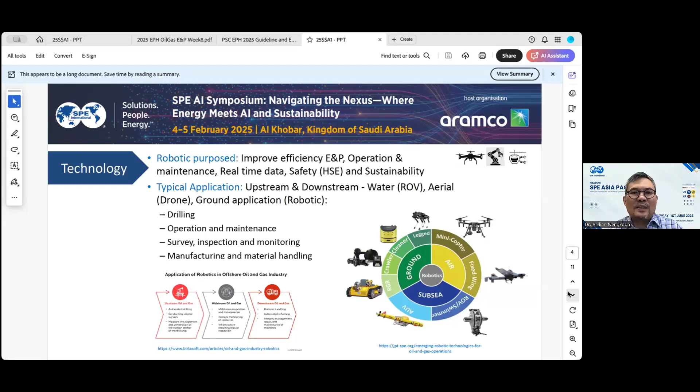So this technology itself is currently ongoing, and we use it in many cases. And of course, as petroleum engineers, we ask ourselves, what is the robotic inside? What kind of hardware or software content is inside these tools?

Let me explain a little bit the components inside every robot - either drone or ROV in the subsea, and also leg type ground robotic. Every robot should have at least 4 or 5 components. The key component, of course, is the controller, and inside the controller there is a power system.

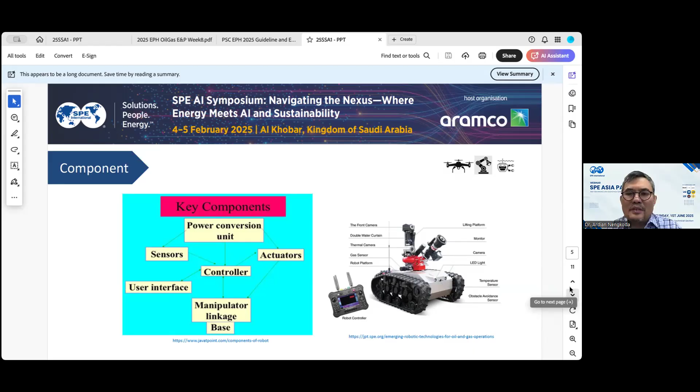Because every robot needs a power system, they also need to have an actuator, sensors, and also a manipulator. All of these are also provided with human interface tools such as a UI. On your right side, there was an example where kids or ourselves use a robot as a game in everyday basis - this is one example of the tractor type robotic currently used in our industry. So that's the components of every robot.

Let me also share with you pictures of an example of the robots currently used across our oil and gas industry and also energy. On your left side at the top, there was a 4-legged robotic from Boston Dynamics.

In the middle, there's a robot inside of the pipeline doing painting. There is an internal special painting used in our oil and gas pipeline to serve sour gas or sour oil, something like that.

On your right side, there is a drone - drones are flying around within the offshore platform facility. This is an example from Abu Dhabi and also from Saudi Arabia. At the bottom left, there was a tractor type robot being used currently in offshore - that's an example from PTTEP in Thailand offshore. And of course, another very popular one is the ROV inspecting subsea pipeline applications.

So how is this latest technology applied, for example, at the upstream wellhead or Christmas tree inspection? Basically, they can help with wellhead maintenance, such as greasing, painting, plugging, and some drones can help doing real-time surveillance to check if there is leaking or growth of the well, and also taking data both aerial or at the platform itself, and also at the subsea.

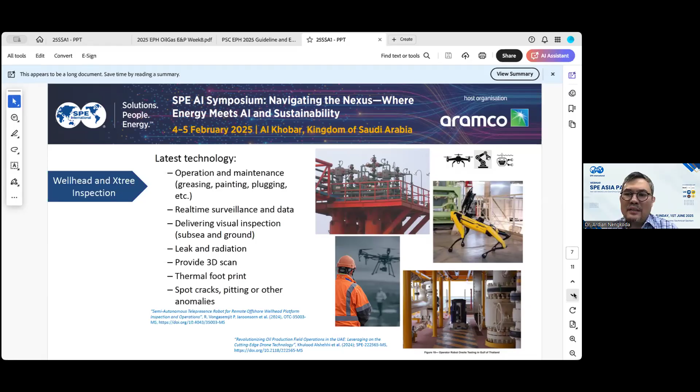The next topic that's very interesting for all of us is the challenges. We observe the challenges happening so far are in terms of cost. Most of these robotics are expensive, so we need to be careful hiring them and reducing operating costs directly. Before we hire any robotic services, as an operating company we derive the pros and cons, what's the economic benefit and so on.

We also observe skill gaps. Pak Rian and Pak Dr. Agus will highlight this later - what kind of skill, training, and certification we need, because not every drone or every robotic can be applied easily. There is some expectation from the government and local authority on how to operate any drone, for example.

And then what is the automation impact? As a student, for example, we are afraid that the robot will replace our skill, our work. Is there a true story that the robot will replace humans? I think that needs to be carefully observed and analyzed.

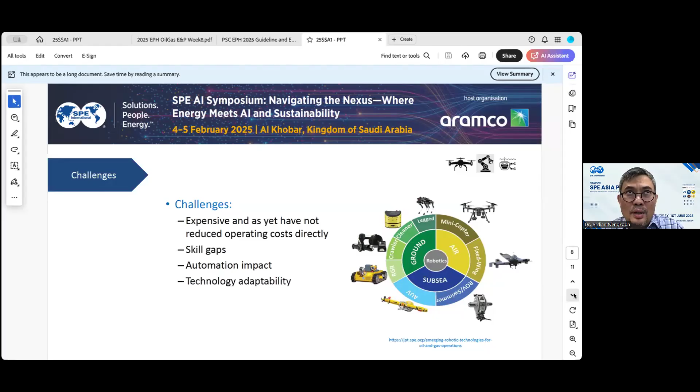the robotic as a tool is born from the military industry. Then it grew to medical - if you've heard about medical robot applications - then grew everywhere across manufacturing and industry. So we should not be afraid of the presence of the robot. We should capitalize on the opportunity. That's the main message.

Currently, what does the future look like for a drone, for an ROV, for land and ground robotic applications? As you can see on your right side, the trend and demand for drones especially are increasing very massively. It can be used everywhere, benefiting our day-to-day operation or activity. The way Mbak Yuni and I see it, the future of robotics within oil and gas, energy, is not far away from what's currently happening.

We expect more and more integration of AI and machine learning into the robot. We believe the cost to develop and hire this robotic technology will reduce over time. And we believe the robot will become smaller, more intelligent, more reliable, and capable of carrying out more tasks.

Like Bapak Dr. Agus and Pak Dr. Oki Muraza, we hope that with the spirit of today, Hari Pancasila, there will be more made-in-Indonesia robotic hardware or robotic tools. We also observe that the robot will hopefully produce a lot of data, so there will be a trend of cloud computing, software as a service, and robotics as a service, something like that.

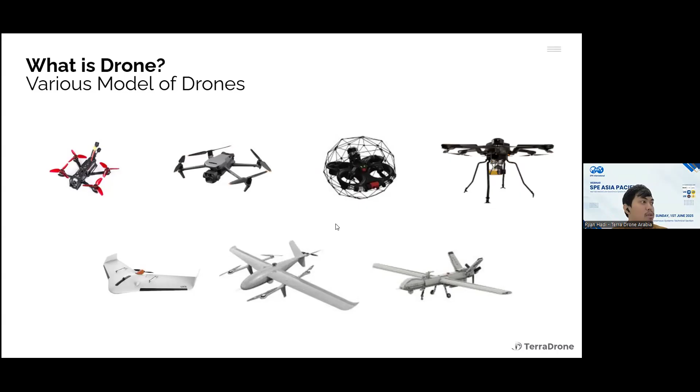Right now, all of these drones are available in the market, and they're being used for particular cases, really helpful especially for each domain. As I mentioned, there are some correct terms, but it's really technical, so I don't really encourage you to read into this. I just want to mention that drones are already being used a lot in many industries, not only oil and gas, but also construction, infrastructure, power and utilities, mining, agriculture, and others.

And the trend is still there. Even though we've been seeing drones for quite some time, used in many use cases, the use case is still growing, and the technology is also growing very fast. So it's really the right time, if you're interested in drones, to try to include it as part of your skill set.

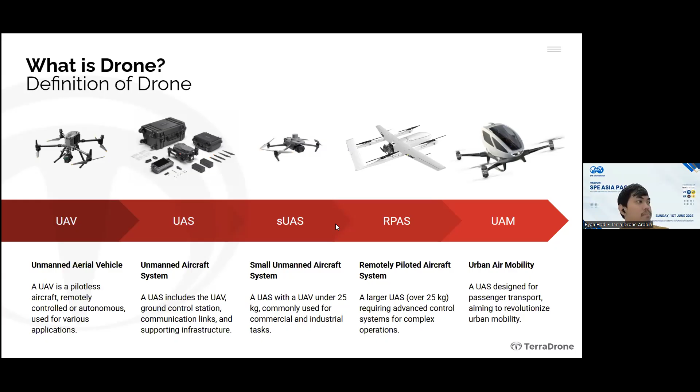And when you talk about drones, there's already a clear categorization based on weight. We have drones that are very small, less than 250 grams, useful for specific use cases. Then we have drones larger than 150 kgs, mainly used for delivery and logistics purposes, but also for surveillance. But most of the drones used in industries are actually these two: micro and small drones.

Usually the drone weighs between 250 grams to 25 kg, considered formally as a small unmanned aircraft system, or SUAS. Most countries already have specific regulations on that. It has been used because it's really versatile, you can play around with the payload, you can play around with the model, so that it can serve you for a specific purpose.

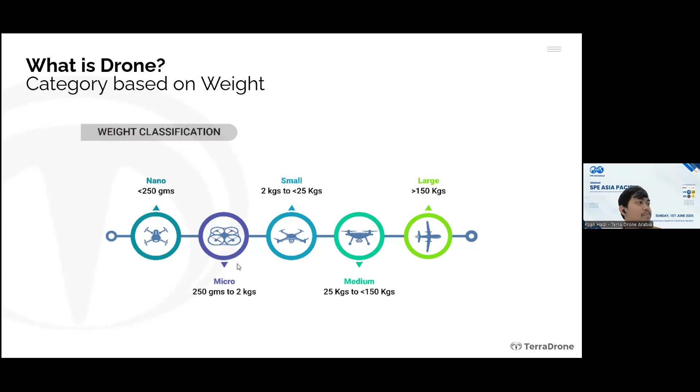In terms of the model and characteristics, there are also some categories, but I think that's a bit too technical, so I won't touch on that.

What I would like to share more here is about applications, as the title of my presentation suggests. I'd like to focus more on practical use cases, but before that, let me explain.

When we talk about applications of using drones, we can split into three main categories. The first is sensing, where the drone's main role is to collect data, which can be used for inspections, surveillance, or survey and mapping.

We can use any kind of payloads for this. For example, for inspections, as simple as taking pictures of oil and gas equipment, and based on these pictures we can identify if there's any damage, cracks, or corrosion. Right now, inspections can even include NDT inspection using drones.

We can easily do thickness measurement using UT or EMAT, or even measure coating thickness using drones. When it comes to inspections on oil and gas equipment during shutdowns, this practice eliminates the requirement to erect scaffolding, saving a lot of time and cost, and shortening the shutdown period, especially for inspection scope.

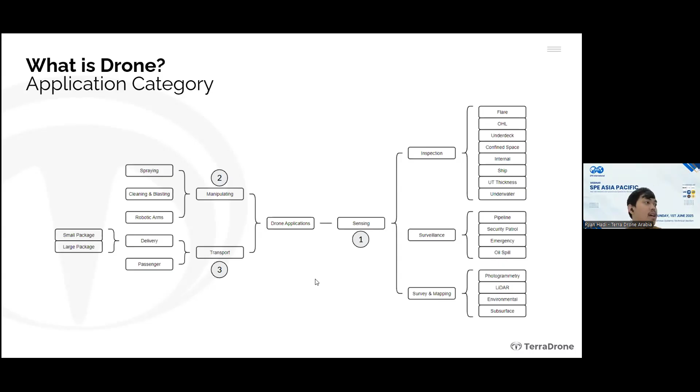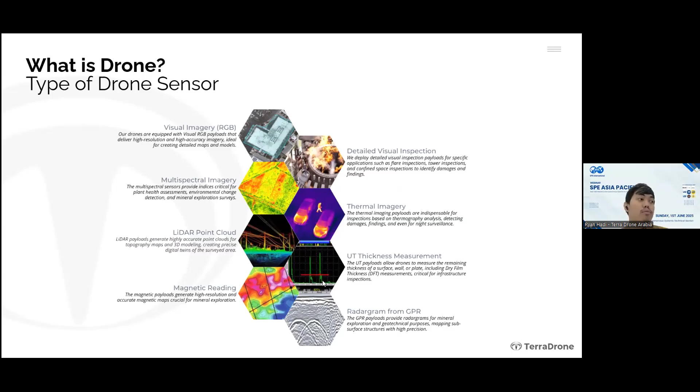In terms of data, as I mentioned earlier, we have many options—not only visual pictures but also multispectral imagery, thermal imagery, UT inspections, and even geophysical sensors that can be equipped on drones, giving us magnetic readings or radargrams from georadar, among other things.

In terms of application, I want to share the latest survey conducted by a market intelligence company in Europe. Right now, most drone applications are mainly related to mapping and surveying, especially in construction and infrastructure, since that's where the main benefit is obtained. But inspection is also significant, mostly happening in oil and gas.

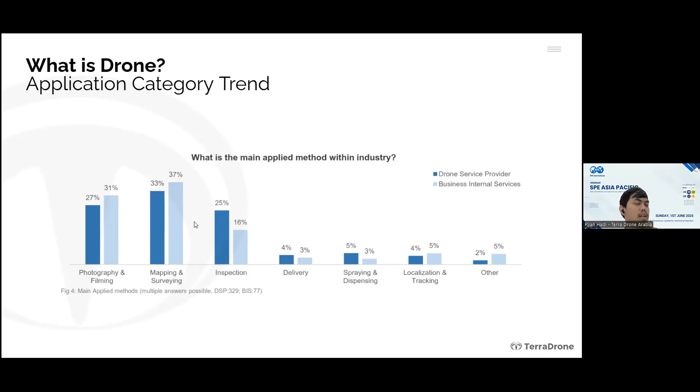Why is China so big? Because in China, drones are used everywhere. You can order KFC and it will be delivered by drone, and this has been happening for years, not just last year but already 5 years ago. That's why we see a lot of drones flying in China, even in entertainment, like drone shows where drones fly together to form shapes like dragons. That's why China is there, and flying in China is pretty easy.

The number of flight hours in China is huge. Second is USA because of the size of the business and economy, and third is Europe. Most countries with a lot of flight hours are mainly driven by ease of regulations. In US, China, and Europe it's pretty easy to fly, but in other countries it's still difficult. However, we see this expanding, with other regions trying to catch up in terms of flight hours.

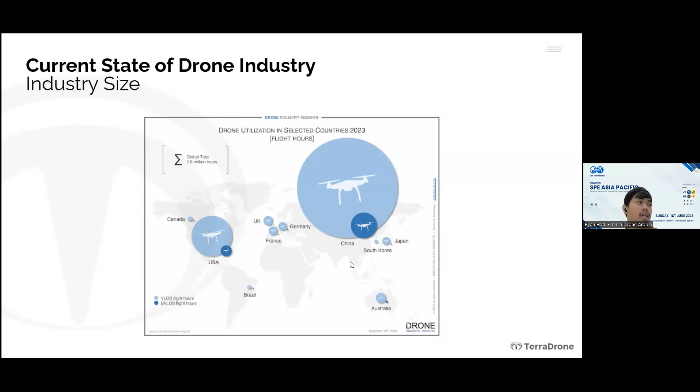So it's really interesting right now to see how drones will be helpful in most industries. When we talk about drone companies, maybe 10 years ago we only had around 100 to 150 in total, but right now there are more than 2,000 drone companies in the world. In Indonesia alone, we have more than a hundred, whether focused on developing hardware or providing services.

I just wanted to show you again the growth of the industry, and definitely it's there because it's driven by market demand.

When we talk about applications in oil and gas, I'll be very specific. We can split it mainly into 4 categories: the first is activities related to inspections, the second is survey and mapping, the third is environmental monitoring, and the last is surveillance.

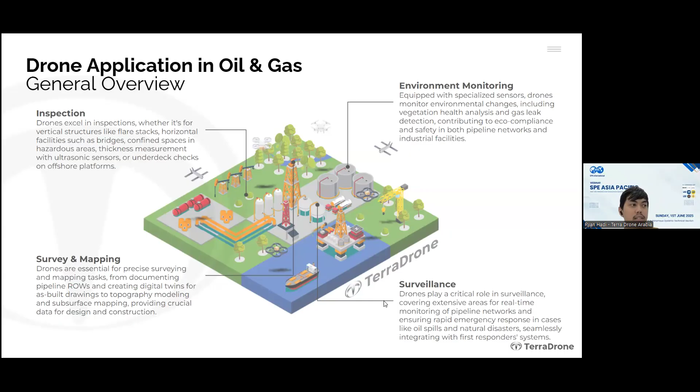For inspection, as I shared earlier, drones can easily take pictures, whether visual or thermal, and can also do NDT inspection. Applications include flare, OHL inspection and any vertical structures. We also have applications for confined spaces, sending drones inside a storage tank or boiler or any other confined space so it can tackle work safety issues easily.

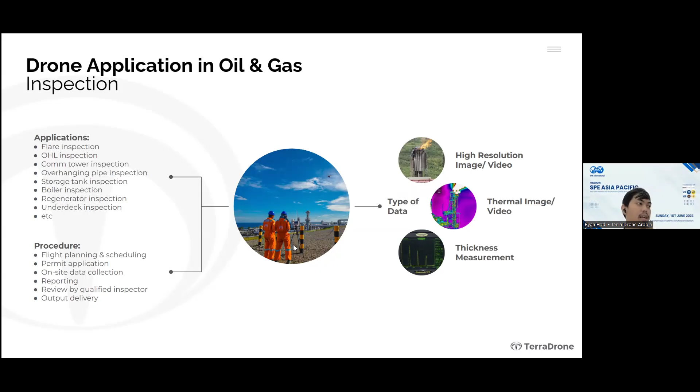One example of using drones in inspection is visual inspection on a flare. As you can see, the drone can easily get details because most drones used for inspection are equipped with an ultra zoom camera, which can zoom up to 200 times so you can get all the details required.

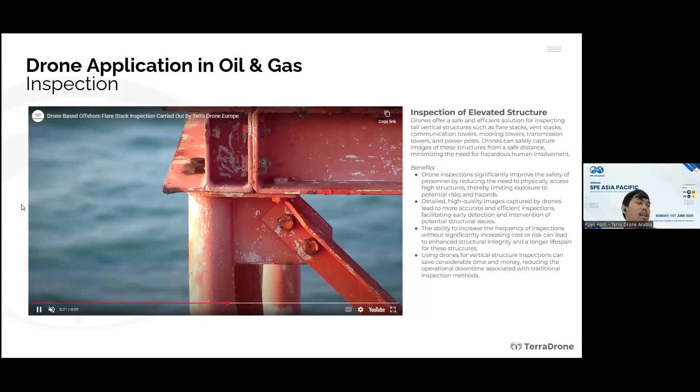Another example is using drones for UT inspection like this. The drone needs to be in contact, but it can measure all the points easily so we can eliminate the requirement of scaffolding.

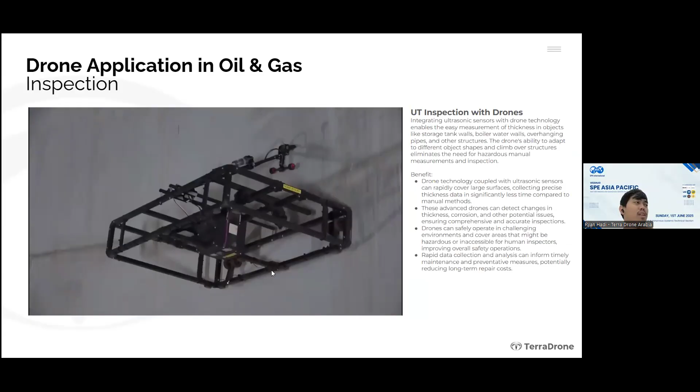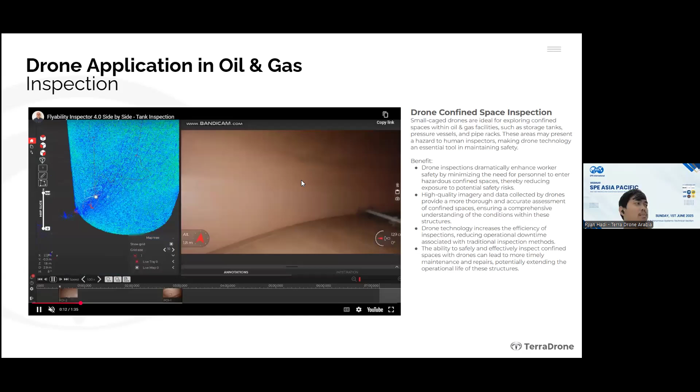The third example is confined space. We can easily send drones inside the storage tank, and the drone is equipped with a laser so it can get not only visual data but also the 3D model of the storage tank, so if we find any findings, we can understand exactly where the location is.

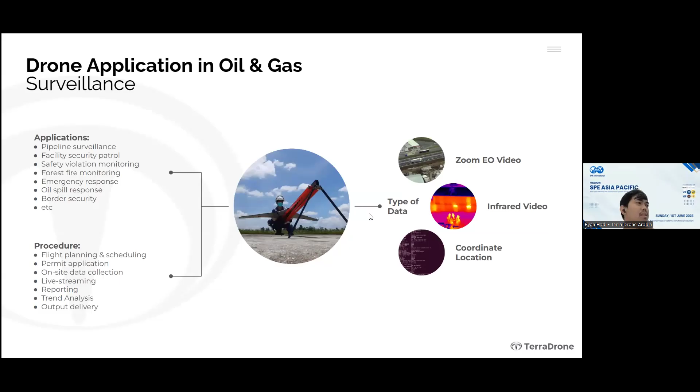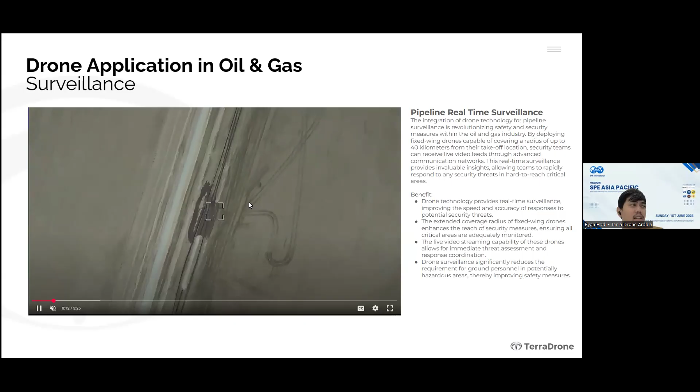After that, for surveillance, this is mainly related to security patrol. One example we are doing right now in ADNOC on a regular basis is using our drones for pipeline surveillance, so we can easily identify any oil leak, encroachment, or other findings during our patrol.

It can also be used for oil spill response. The drone can help the crisis center or crisis management team see the information from above, which helps a lot in getting situational awareness.

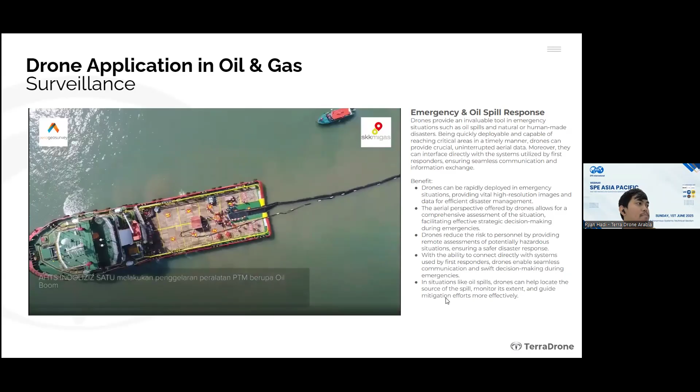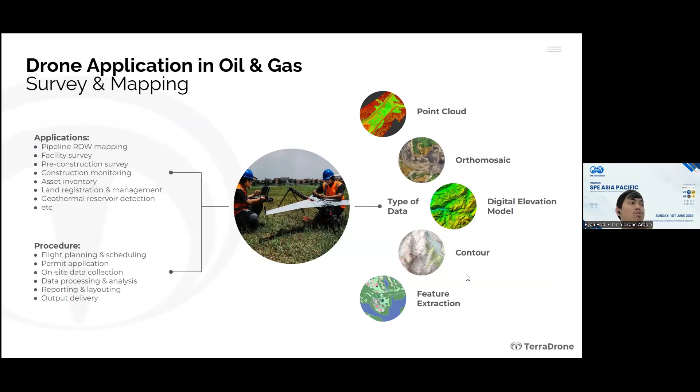And then after that, we also have survey and mapping. This is mainly related to topographic survey. So whether it's for explorations, to help seismic activities, or to do pre-construction survey, we can do this as well.

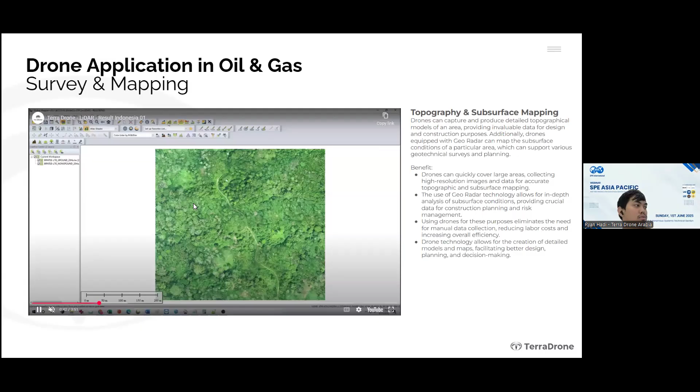One of the examples, right now it's really easy to do topographic survey using drones, and we can equip them not only with a camera but also with laser, so that at the end we can get this kind of data, which is really helpful for design or site planning or other activities related to pre-construction.

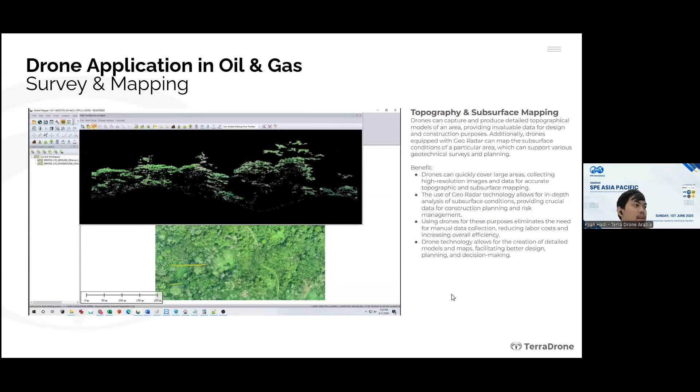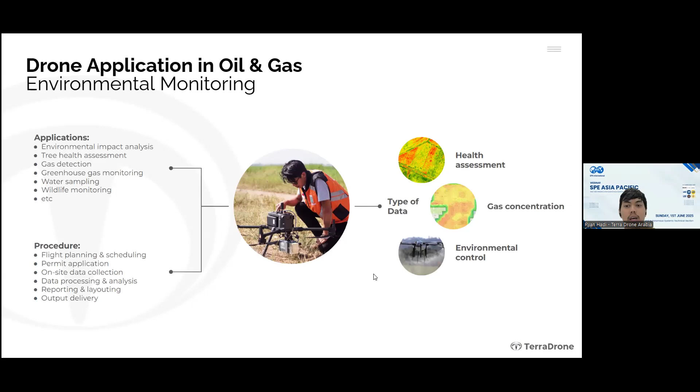And the last one is related to environmental monitoring. So the drone can be equipped with specific sensors like a multispectral camera or even a gas sensor. One use case is to use drones for emission monitoring as well as gas leak detection. The idea is to attach a gas sensor to a drone, and then we program the drone so that it can fly automatically.

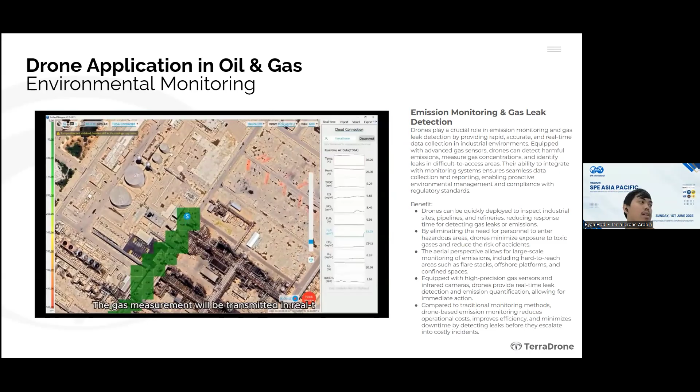At the end, what we get is the measurement of concentration of each gas, whether it's greenhouse gases, methane, or even hazardous gases. After that, we can do further assessment and analysis to ensure compliance with environmental regulations, for example with OGMP, LDAR, or any other standard.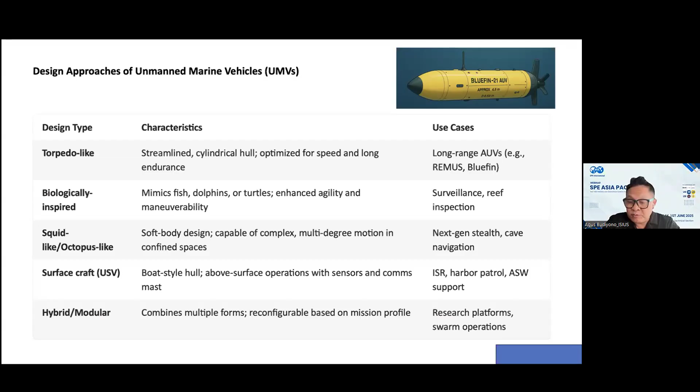I mentioned about how the UUV move. Primarily in the early days, people relied on propellers. It's a propeller-based system using traditional rotary thrusters, efficient for long endurance missions. For instance, if you'd like to cover a long distance for many kilometers, you would rely on a propeller. The second one is jet propulsion.

That's good for quiet and fast acceleration. The third one is something I mentioned earlier, when people try to mimic the motion of the fish. Basically, they simulate the fin motion, so the method is called undulating fin motion. This is good for high maneuverability and low disturbance.

The next one is pulse propulsion. It's also biologically inspired, especially by squids, and the locomotion is done through pulse water ejection. It is advantageous if you need an agile maneuver, and also need to operate in confined spaces.

Another one is biohybrid. This soft actuation uses soft robotics for flexible movement, and this is ideal for stealth and sensitive missions, like military missions.

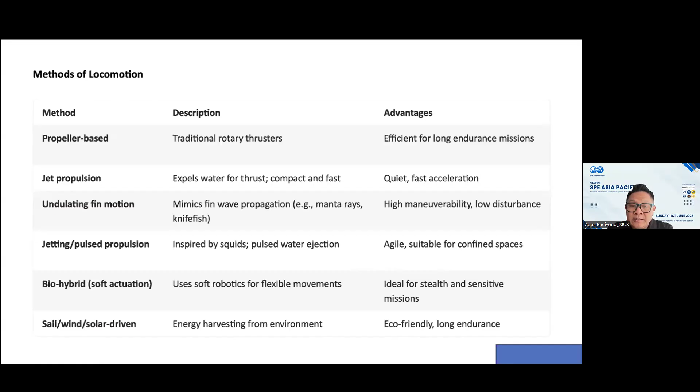The last one is sail, wind, or solar driven. This is the eco-friendly, long endurance unmanned marine vehicle. It can operate not only for days, but sometimes months and even years, without the need for fuel, because it has the characteristic of energy harvesting from the environment.

So then I will move into the second part of my primary message this morning. It's about underwater navigation, packaged together with guidance and control. So what makes underwater operation different from aerial and ground modes?

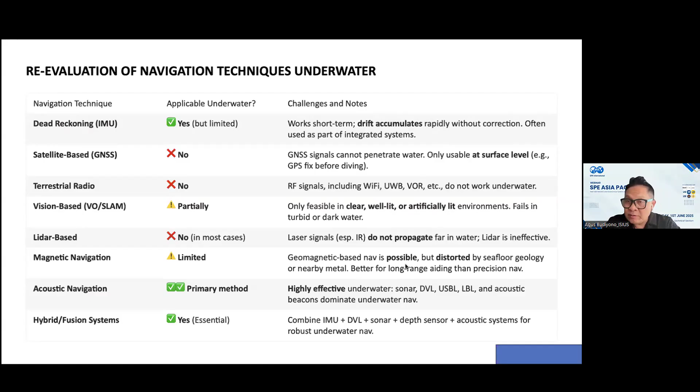The last row in my table is the hybrid or fusion system. This is, in fact, the essential approach for navigating underwater. So you want to integrate between IMU or dead reckoning and other working sensors. This is the summary: IMU is one of the primary models for you, and then you can combine it with the DVL, depth sensor, and there's another one, LBL or USBL, and there is a sonar.

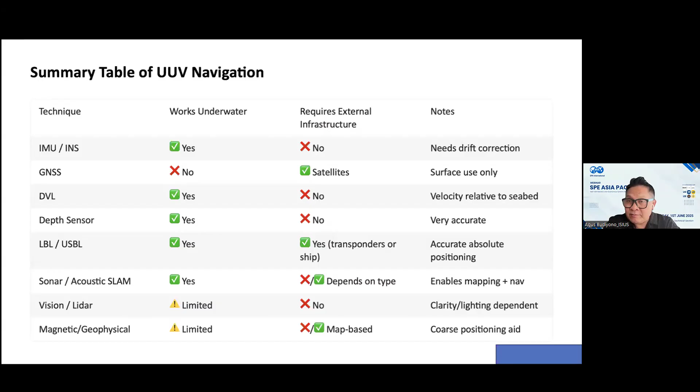And then the camera has limitations, but sometimes you need to use that when your operation needs to capture an image from the environment. That's an example of use, but I won't go into detail because of time limitations. So quickly, typical UUVs in the world use this array of sensors to operate.

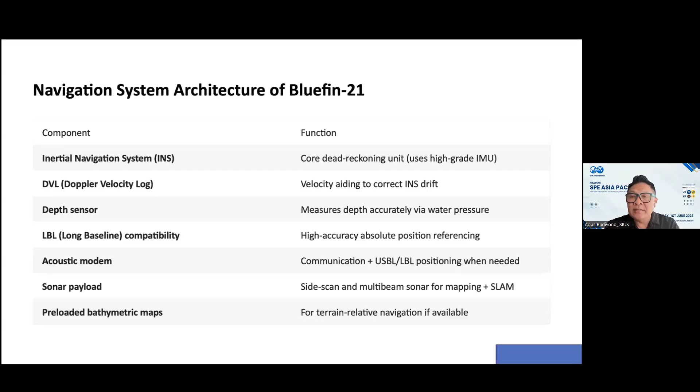And then again, the guidance summary: you need to start with mission planning, and then you integrate between several navigation sensors like IMU, DVL, depth sensor, then sensor preprocessing, sensor fusion, and state estimation prior to designing your motion control. That is the typical guidance of a UUV.

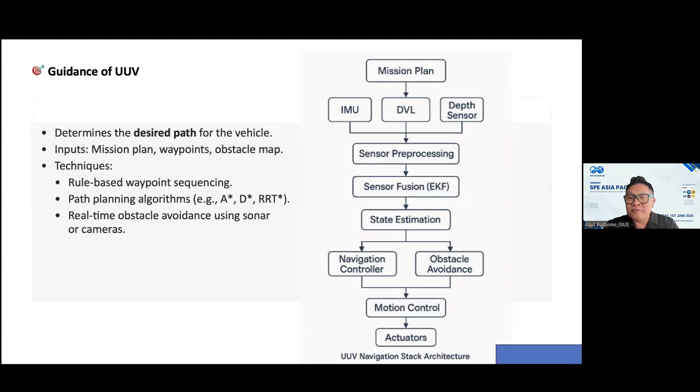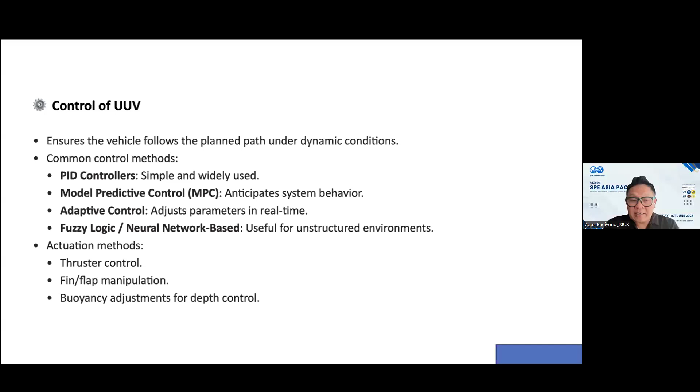Now, the control part: once you have all the data from your sensors, the control technology is pretty mature. Some of you who studied controls in college might have learned about PID, maybe model predictive control, adaptive control, and also fuzzy logic. I won't go into details, but these are things you can utilize. Again, it's a mature technology.

Now, the last message is about the application of UUV in the oil and gas industries. Pak Rian already mentioned a number of them, so I'll just emphasize a few here. It can be used for survey and mapping, inspection and maintenance, and also construction support. For inspection, one example I'll show is sedimentation detection. Other than that, you can also detect corrosion, cracks, or leaks in pipelines or other constructions.

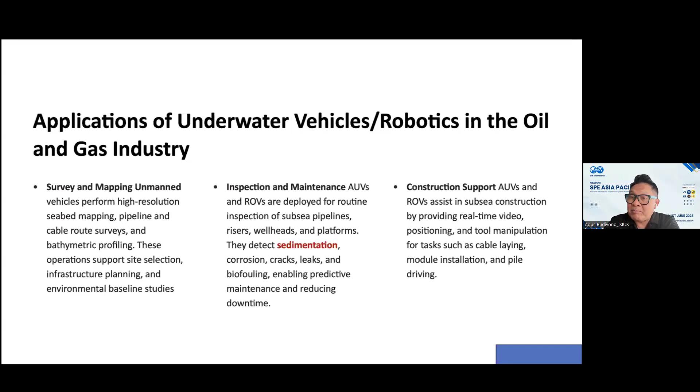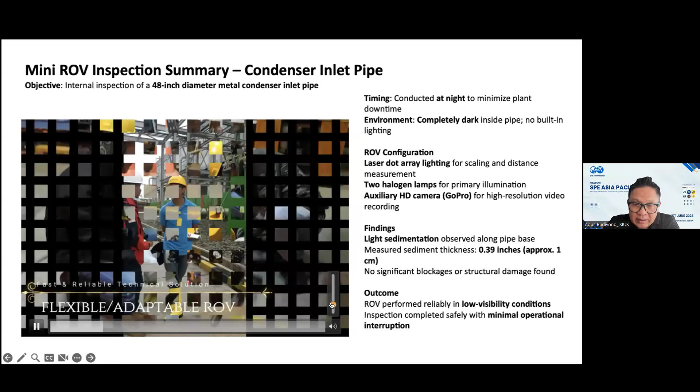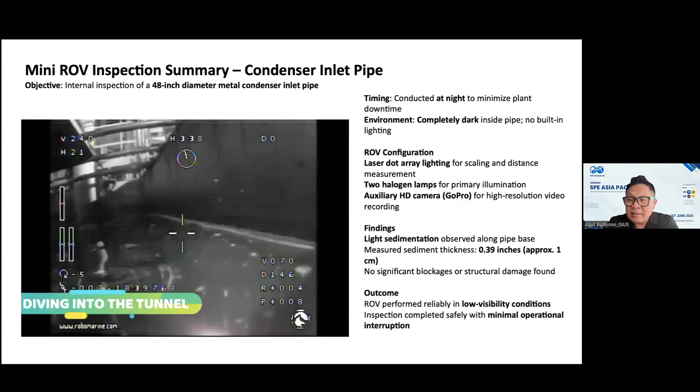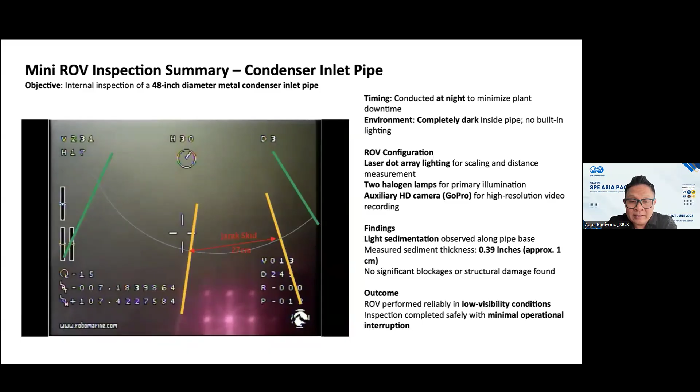Let me check whether I can play this one. This is one of our ROVs designed by an Indonesian company. Let me quickly go over this one. It's basically for doing inside-the-pipe inspection, in particular to detect sedimentation. As you can see, the underwater environment is not so friendly - it's murky and dark, so you need to rely on a good sensor system to gain results. In this case, the finding is specific: there is light sedimentation, and the measured sediment thickness is approximately 1 centimeter. That's something clients sometimes need to check the viability of their construction.

Next, other applications of UUV in the oil and gas industry include troubleshooting and intervention, environmental monitoring, and the last one is surveillance and security.

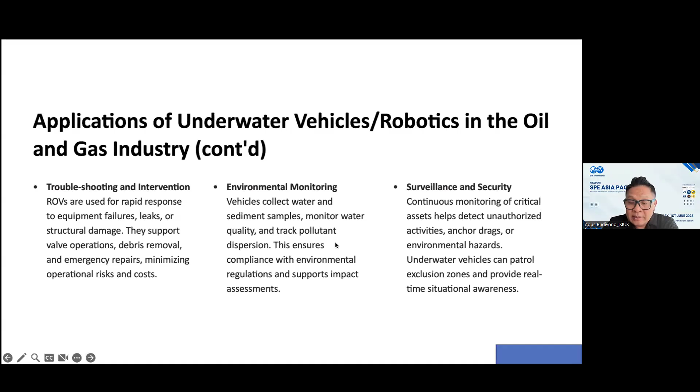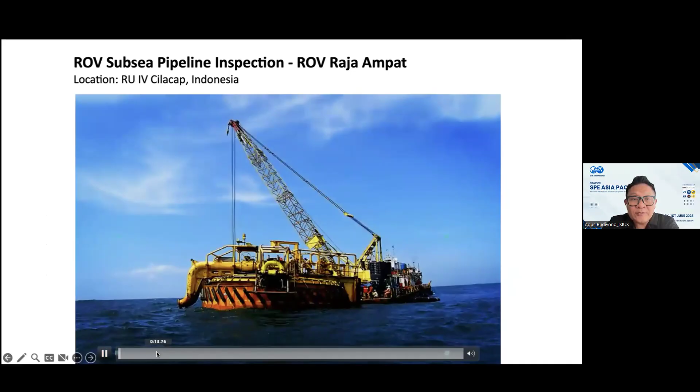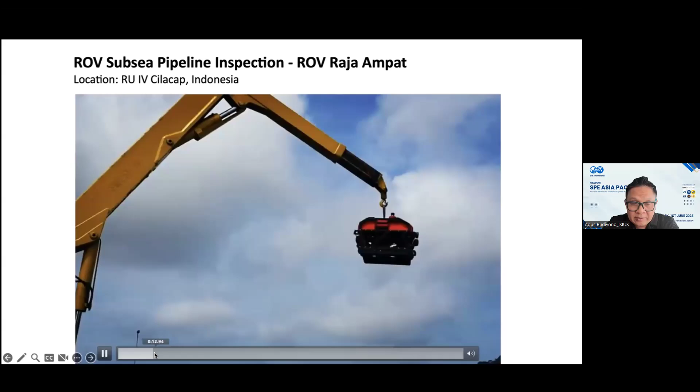Another quick example, also achieved by a company from Indonesia, and hopefully this technology can be utilized more within our own industry: it's the pipeline inspection at refinery unit 4 in Cilacap, used by Pertamina. This is the ROV Raja Ampat.

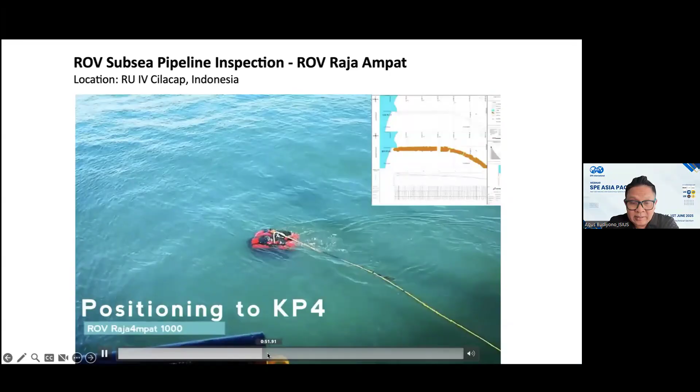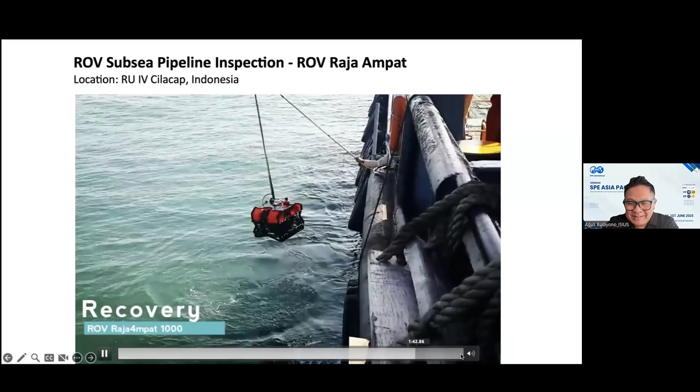I'll just quickly go over this one. It can do the inspection underwater along a certain path, with all that navigation, guidance, and control designed exclusively by our own engineers. Of course I observe what happens in the unmanned industries in our region, in Japan, in China, and I sincerely hope there are more players from Indonesia for our own industry.

So these are the benefits of UUV applications. Sometimes you cannot send divers to do some deep water operations, so you need to send a UUV. This definitely enhances safety for the operation, increases operational efficiency, reduces cost overall, improves data quality and frequency of monitoring because you can send the robots frequently, and it's capable of operating in deep water and harsh conditions otherwise impossible for humans to reach.

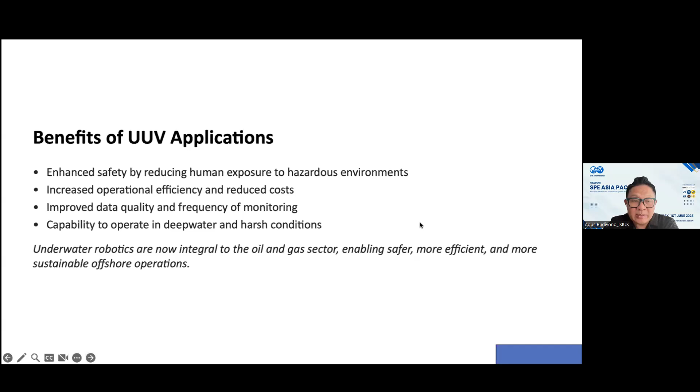So the last slide is about the trend. I think Pak Aryan and Pak Ardian already mentioned the trend of using machine learning and AI, and sometimes integrating several vehicles together forming a swarm - so there's swarm robotic development, and advanced sensor miniaturization. As you can see, some of our designed UUVs are quite small and portable, thanks to miniature sensors. There's also a trend for energy-efficient propulsion, and lastly, improved communication development that enables you to operate deeper.

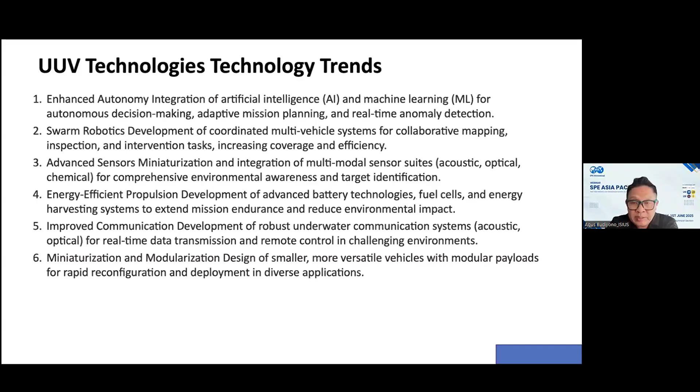Last but not least, of course, this event happens because of the initiative from Dr. Ardian and team, and I again really appreciate the invitation. I think we need to work together, and I would like to bring your attention also to the inline events that will happen also this year in August. So if you are interested later, of course, you can contact me. And I hope that we can work together for the advancement of unmanned vehicle technologies in Indonesia. Thank you very much for your time.